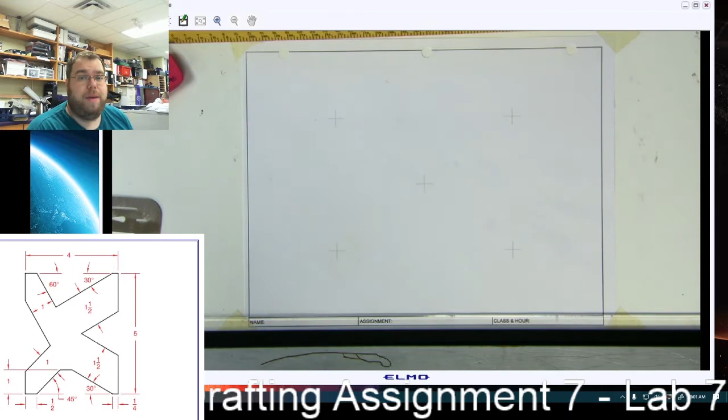And it is the one that looks like kind of a funky X shape. Realistically, though, this is not going to be that hard of a shape to do. You don't have to figure out any strange angles. All of the angles that go into making this come from the triangles that you have.

So, if we take a look at this, and if I can get the computer to cooperate, I will bring it up on the board, but so far this morning, every time I try to open Windows Explorer, it just does nothing, so I'm pretty sure my computer is about to die. If that happens in the middle of the lesson, we will move on as best I can.

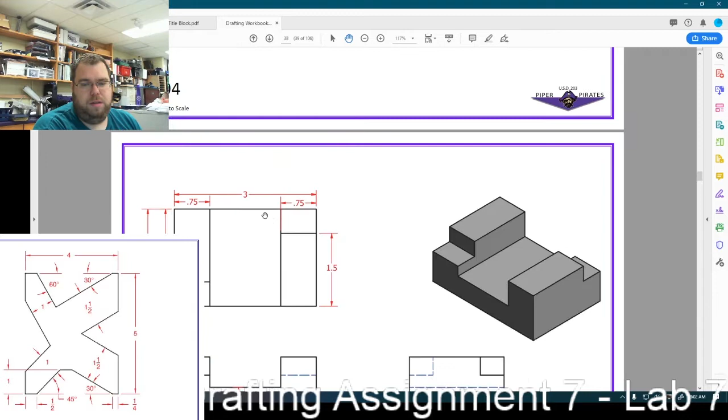Let's see here. Alright, here we go. Alright, so here's what we're going to be doing today.

We're going to center this in the middle of our paper. That's why once again you have a piece of title block paper in front of you that does have the center marking on it.

So what's the first thing that we're going to want to do to draw this shape? Measure the horizontal or the vertical. You can choose which. And then do what with that measurement? Put dots, but yes, that's exactly right. And then let's finish that thought. And where do we put the dots on the paper?

In the middle. So you measure the horizontal, you find the middle of your paper, and then what do you do to figure out where the dots go on your paper horizontally? We're missing one step here to get to place it right. Centered, but how? How do we know? Do you want me to explain it?

Just yeah. Okay, so it's 4 inches wide. So you want the left side to be 2 inches and the right side to be 2 inches. Right. So you take your 4-inch measurement, divide it in 2, and then you put the center, so in this case it is 2. You put the number 2 measurement on the center of your paper.

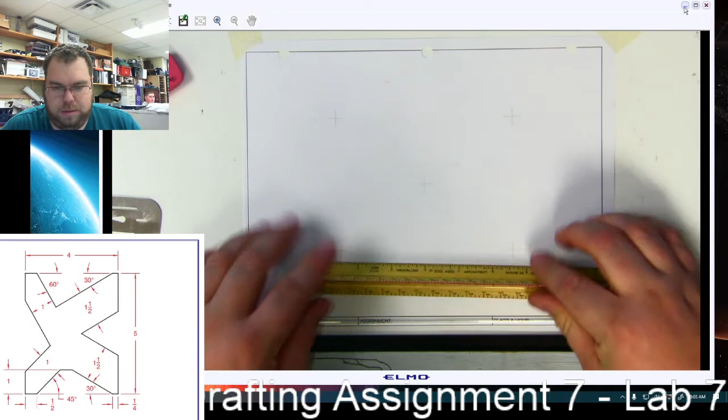So remember, like this. Take your scale, find the number 2. There you go. And you place it so that the number 2 is centered on your paper. Okay? Justin, you want to put your phone away and follow along, please? Yes, sir. Thank you.

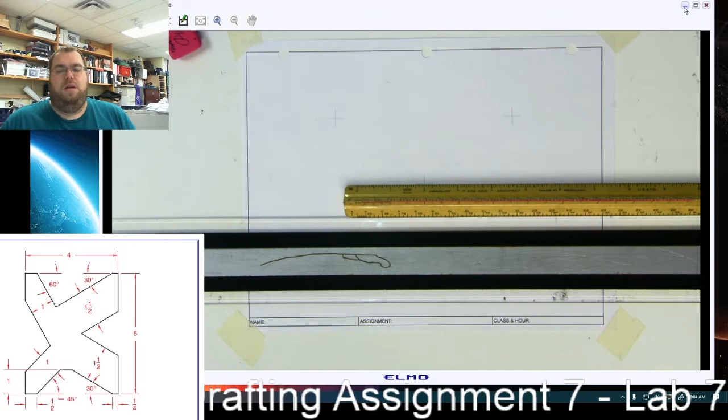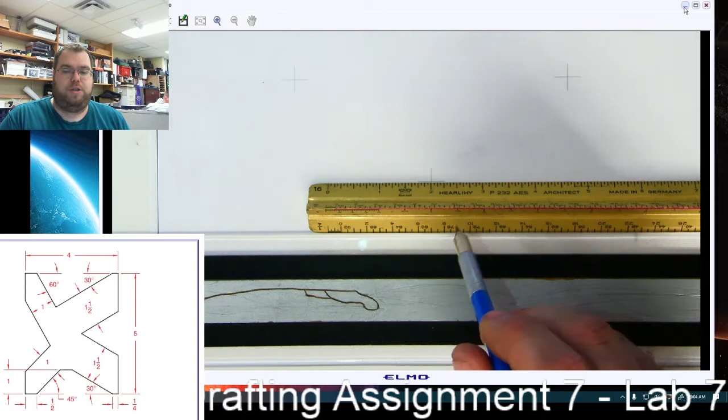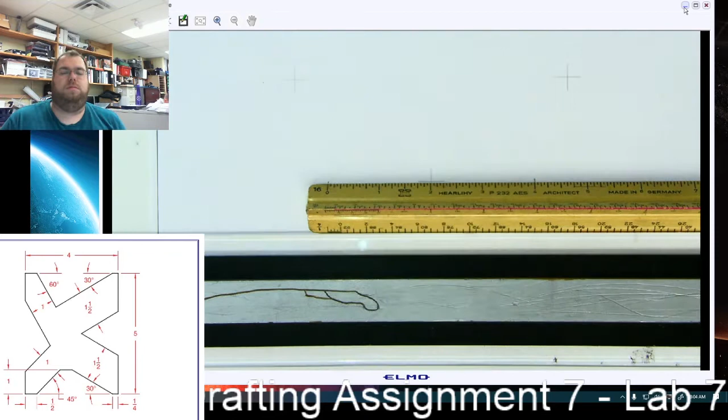Alright, let's see. Zoom in on that a little. There we go. Alright, so I have my scale set up so that the 2-inch mark is sitting on the center mark of the page. And then I put a mark at 0 and a mark at 4. Gives us the outside edges.

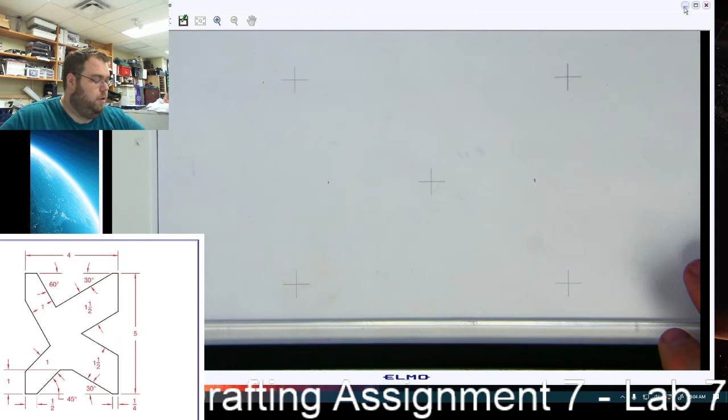And who wants to explain the horizontal or the vertical measurement for me? What do I do here? Somebody I haven't heard from.

Sure. So it's 5 inches tall. Okay. I'm gonna go vertical and make a mark at the 0. Well, line the cross with 2.5. Okay. And then make a mark at 0 and 5. Perfect.

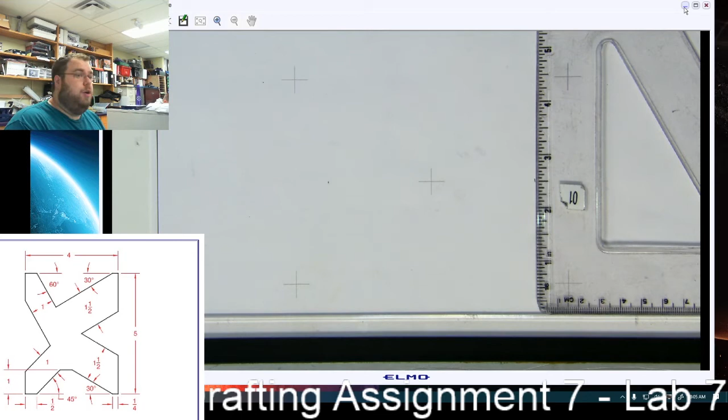And you can do this one of 2 ways. You can either line it up with the center, or you can line it up with one of the dots that you just made. The reason I would go with that is because it gives you an easy way to know where your line stops and where it starts for drawing the top line up here in just a minute.

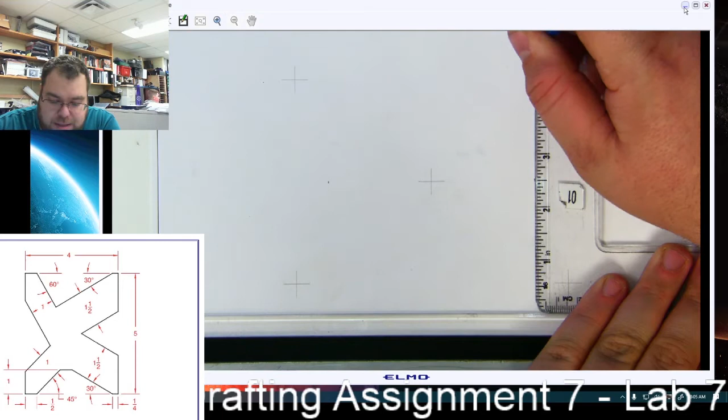So I'm going to set 2.5 on the center line. In this case, I'm choosing the dot. And then instead of making a dot, I'm just going to draw my line from 5 inches down to 0. Remembering that I've got that chunk cut out of mine, which is why the bottom of mine looks terrible.

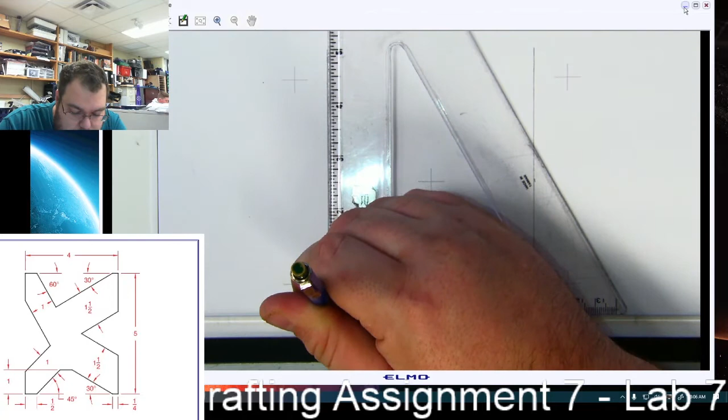And then to save myself a step, I'm just going to slide it over to the other dot that we made and do the same thing again. 5 down to 0. And then I'm going to connect the bottoms before I move my parallel rule.

Now, I am pressing harder than I'm probably going to want you guys to do, because that way you can see what I'm drawing easier on the board. But most of these lines are going to be erased by the time you're done.

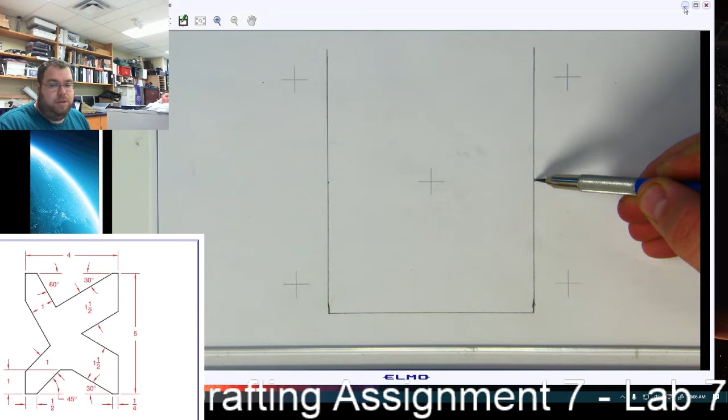Yes, sir? Where do you put the vertical dots? The vertical dots, look, so here and here. Yeah. So the whole shape that we're drawing is 5 inches tall. So we put 2.5 inches aligned with the center, and then you draw a line that's 5 inches long, so from 0 up to 5 inches.

And again, like I said, I'm pushing hard, you should be pushing lightly when you draw that, because most of these lines are going to be erased. Remember, if we look at our drawing here, everything in these cutouts are going to be erased from this box that we just drew once we finish getting the inside stuff done.

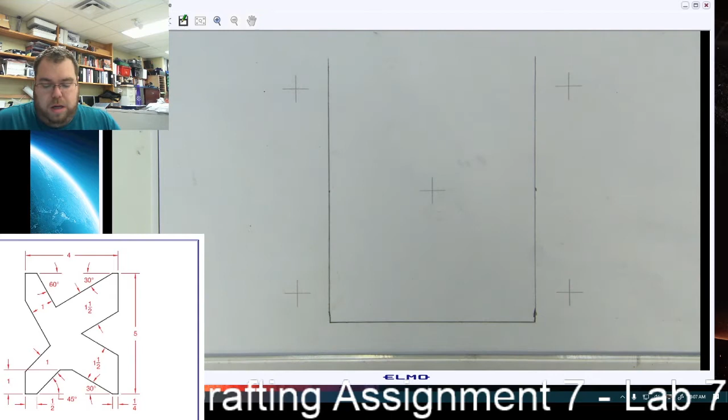So following having that U shape done, the last thing I'm going to do is connect the top, so I have a box. There.

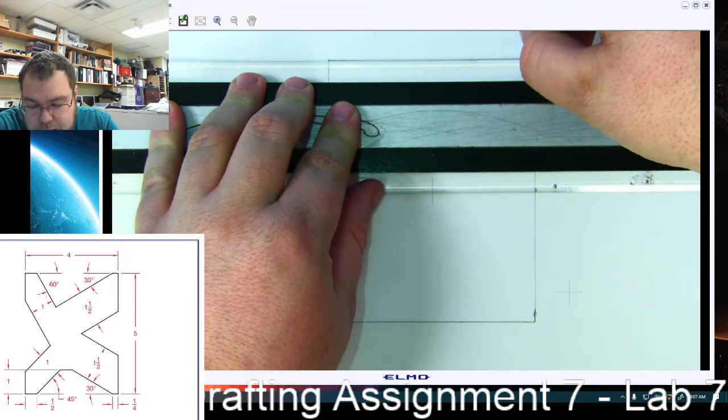Sometimes this can feel like extra work, but as long as you have a box that fully contains your shape, you'll know when something goes wrong with your drawing if your lines are trying to go outside of that box you've made. When they are square or rectangular shapes, it ends up being a lot simpler to create the box that it fits inside of. But even today, when I do drawings now, this is where I start.

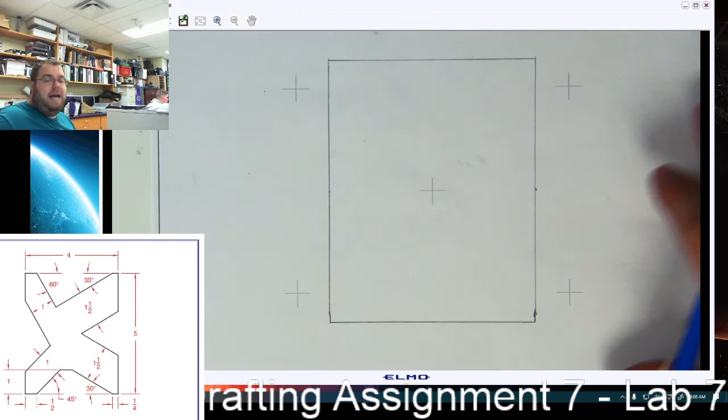It just gives me... it takes the entirety of the paper that we have available, and it constricts it down to just the area that I'm working in. And like I said, it helps me understand if something's going wrong with my drawing, and it helps me understand the overall size and shape that I'm trying to work with.

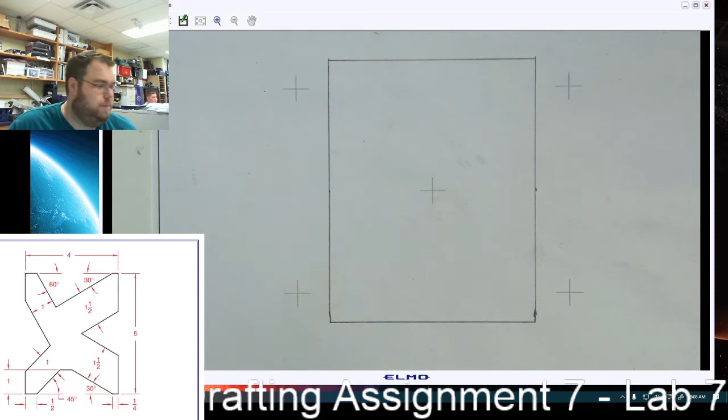And in some cases, it even takes care of lines that I would need to put in later.

Okay, so if we look back at our drawing again, we're going to do as much of our measuring as we can to start with before we start drawing our lines.

So generally with this shape, I work from the bottom towards the top, because most of the information about your horizontal measurements is at the bottom of this drawing, and then they transfer up to the top.

For example, this first line over here is 1/2 of an inch at the bottom. It's also 1/2 of an inch up here at the top. It's 1/4 of an inch on the right-hand side at the bottom, and it's also 1/4 of an inch at the top.

So yes, that's how I figure that one out. The sides are going to be a little more tricky, and I'll show you why in just a minute. Because if we look here, this 1 inch mark right here is not telling us where this corner is that I'm going to try and highlight right there. That 1 inch mark is not telling us where that is. It's telling us where this horizontal line is right here.

And this is pretty easy to figure out the location of, but we have to do some other stuff first before we can do that.

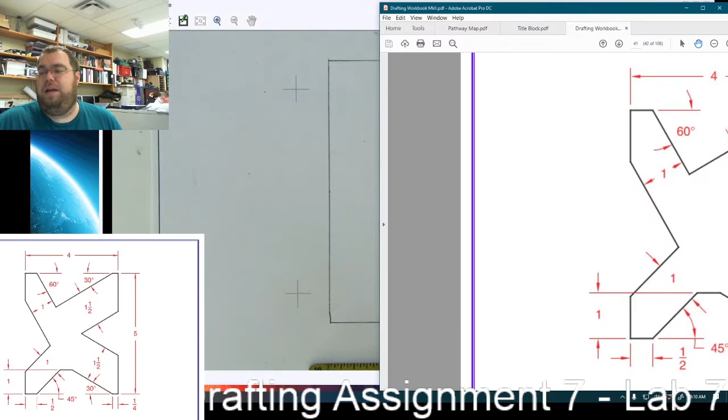So first things first, like I said, we're going to do our horizontal measurements. So I'm going to set my scale back on my parallel rule and line it up so that 0 to 4 inches is measured across the bottom of the shape.

So like I said, we'll make our mark at 1/2 of an inch over. And then on the other side, at the 4 inch mark, so where it's measured to 4 inches right now on here, we're going to come back a 1/4 of an inch. Or if you're reading the measurement on the ruler, it'll be 3 3/4 of an inch. So right there.

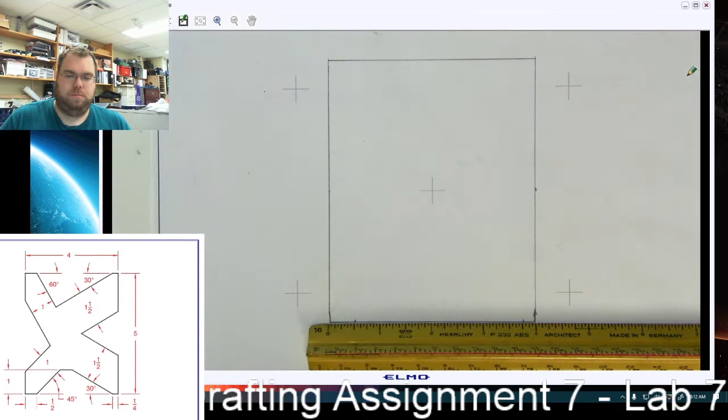The other thing I'm going to go ahead and do before we start doing any of our angles is put that line in 1 inch up from the bottom, but at the moment we don't know exactly where it needs to be placed horizontally. So we're going to make a line that is longer than we need, very lightly, so that we can erase the parts we don't need here in a minute.

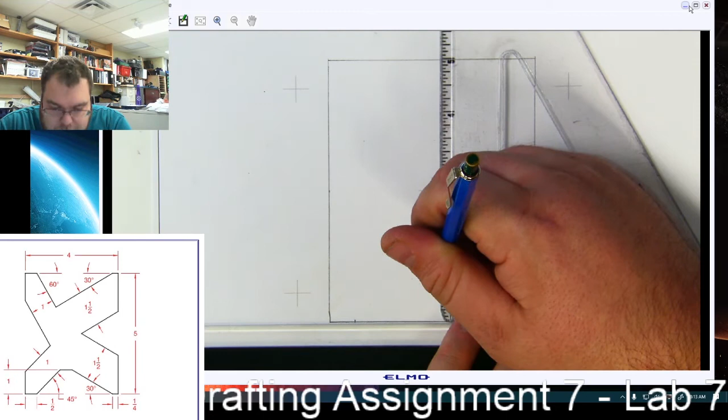And if that sounds confusing, it shouldn't be. We'll just give it a second here. So I'm going to line up the bottom, or my parallel rule with the bottom line. I'll make a mark at 1 inch above that.

Put my pencil on the mark I made and move the parallel rule up. And then obviously this line is far longer than it needs to be. But that's fine because it gives me plenty of room to know where I'm going to have to stop these angled lines that you see right here. So when I draw this line up, it gets stopped by that 1 inch high line.

So that's the last of the horizontal or vertical lines that we're going to draw for this. Everything else is going to be a measurement based off of one of your triangles. In a couple of cases, kind of both. And I'll show you what that means in just a second.

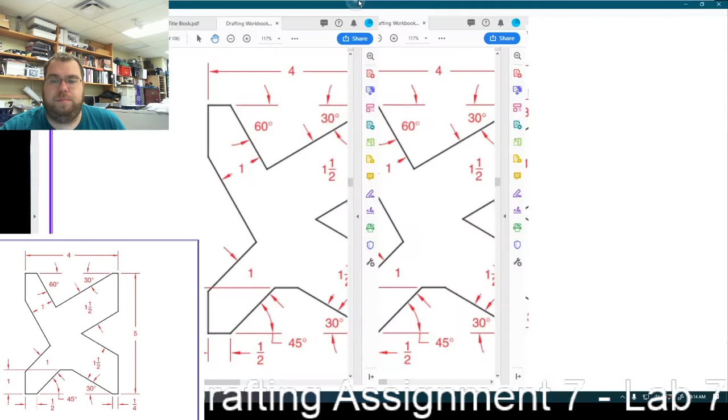So I think the first one that I'm going to want to draw is going to be this 30-degree angle over here. And to do that, it's going to be really simple. So we're going to take our 30, 60, 90 triangle, set it so the hypotenuse is resting on our parallel rule, like that. And then I'm going to line...

The edge with the inch measurements on it up so that that dot we made, a 1/4 of an inch from the right-hand side line, is touching that 30-degree angle. So just like this.

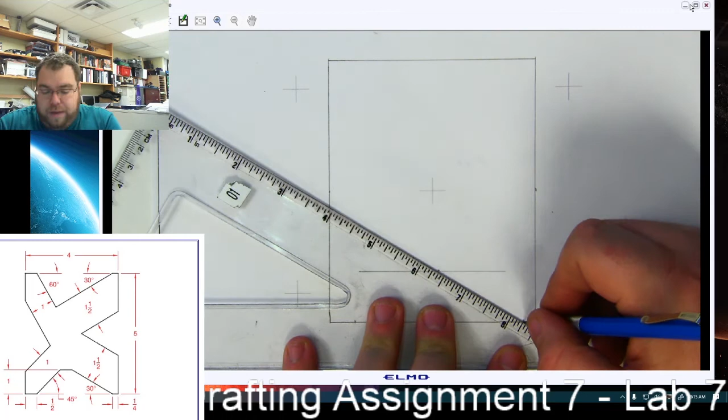And then I'm going to draw a line up to that 1 inch or the horizontal line we drew last, so 1 inch from the bottom. And I went ahead and made that one pretty dark because I know that this is a line that I'm going to keep. There's going to be no erasing there that I'm going to have to do afterwards.

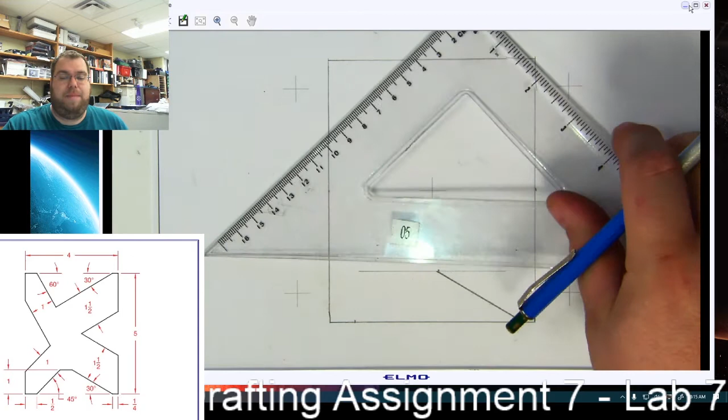If we look back at our drawing, the next one we're going to do, if we want to continue working from the bottom up, is the 45-degree line on the opposite side. The process is exactly the same, except this time we'll use our 45-degree triangle. Everything else about the process is the same. The hypotenuse still sits on our parallel rule.

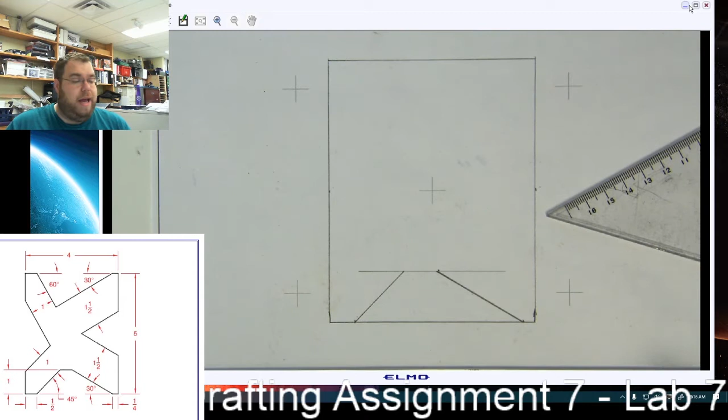We line up one of the equal length edges so that it's touching that dot we made a half inch from the left-hand side, and we carry our line up to that. I made it as dark as I felt like I needed for my final drawing, because this is one that we won't have to erase.

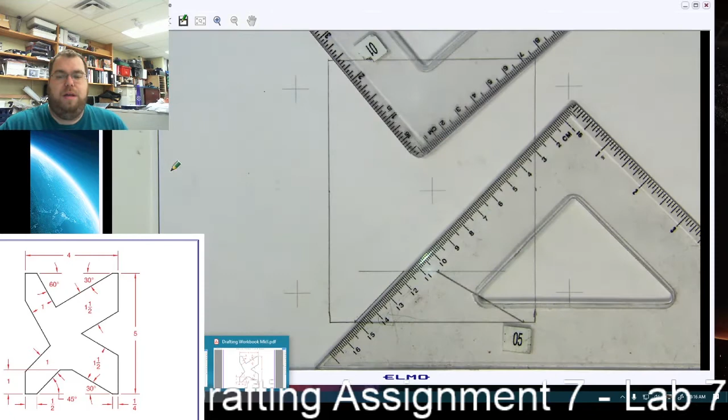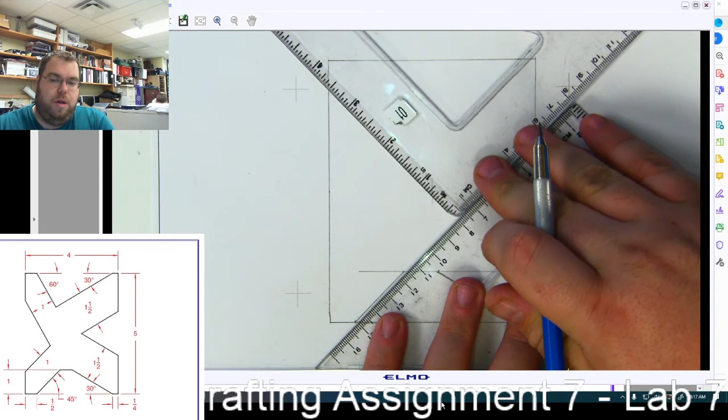Now, before I move the triangle, we're going to have to use both of them together to find our next measurement. We're not changing angles, but if we look at our drawing, this leg of our funky X shape—this top edge of it—is 1 inch away from the line we just drew. So the only way to measure that is to take our 30-60-90 degree triangle and lay it against that edge we just drew our 45-degree line against.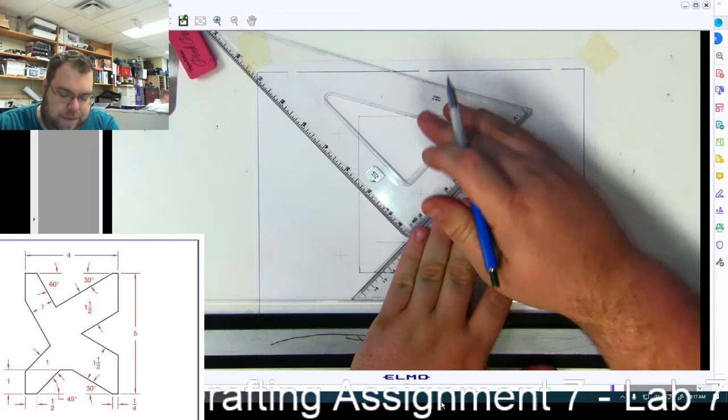So you see what I'm doing here? We have my 45-degree triangle here, and we have the 30-60-90 triangle set so that it is pointing up and to the left. I think after 32 years I'd instantly know what's left and right, but sometimes I have to think on it.

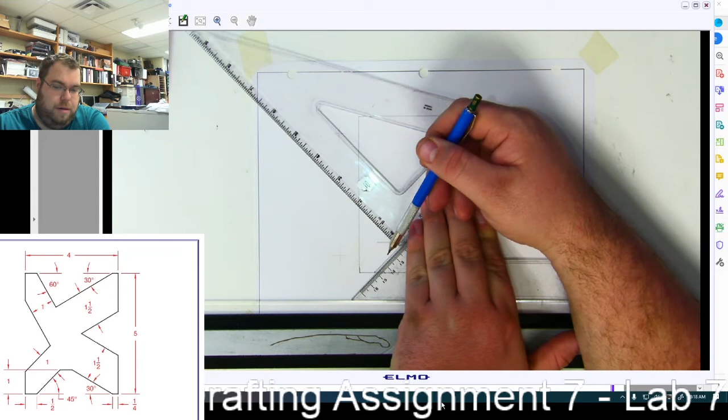Okay, so what I'm going to do then is put a mark at a measurement that is 1 inch away from the line we just created. So we have our line here, we're measuring up this direction, and we're putting a mark at the 1 inch mark.

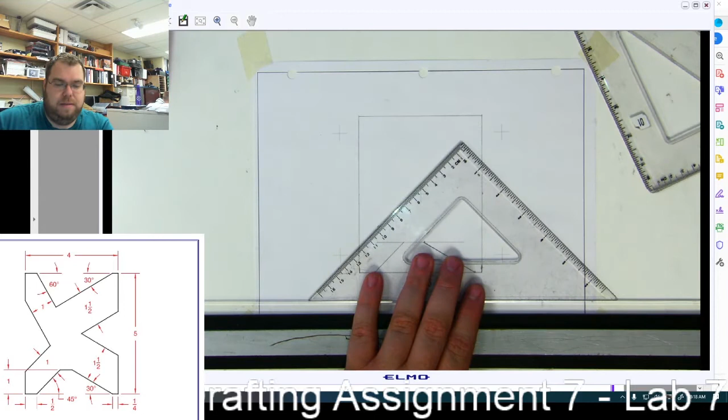Once that's taken care of, I will just slide my 45-degree triangle over and follow the same process we did a minute ago. The only difference is I'm not going to press as hard, because part of this line is going to be erased where it meets this line right here. We will do that after we finish the top.

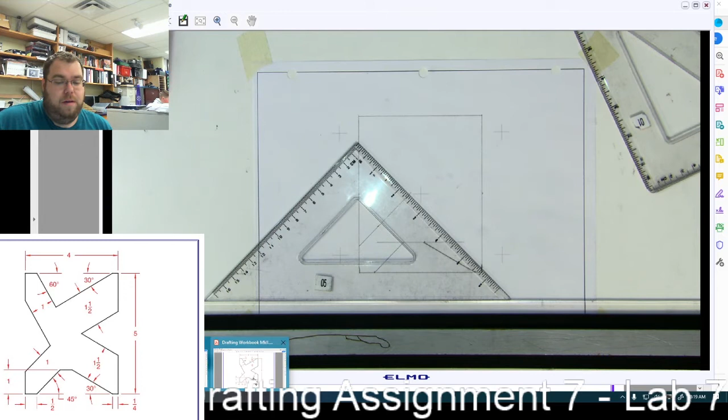So from our line, I'm just going to pull up a ways as long as I know it is farther than we need. We're going to do the same process we just did for the other side. This one is 1.5 inches away from the 30-degree angle.

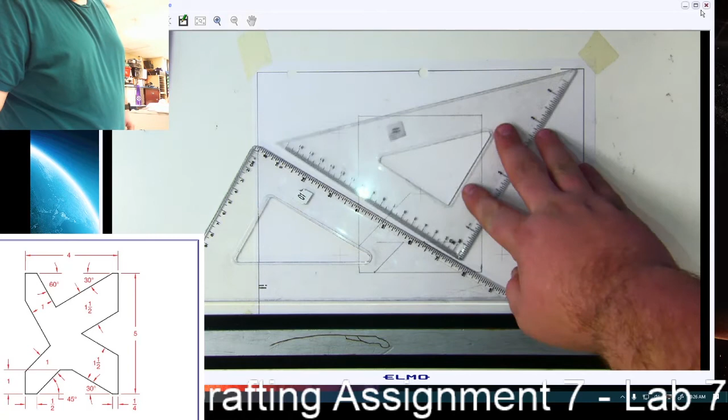Just a second, you're going to switch triangles so that you have the hypotenuse of your 30-60-90 triangle set up like this. Set it against the 30-degree angle on the right-hand side. Then you set your 45-degree triangle like this on top of it. It may not fit if you flip it over—the numbers are just backwards, but they still measure the same.

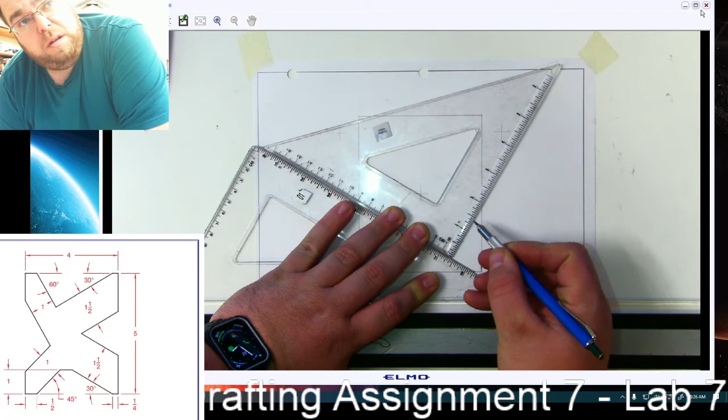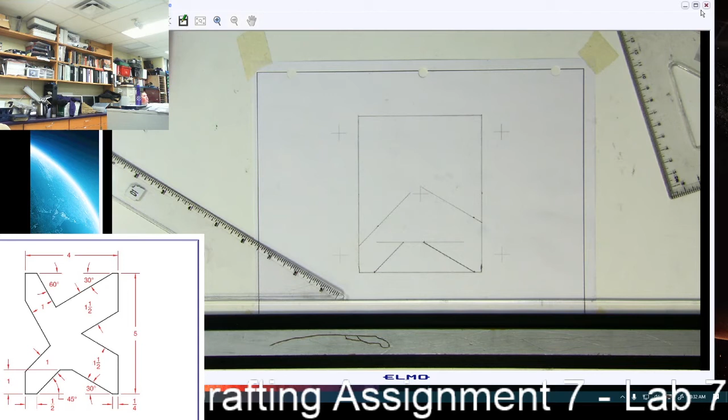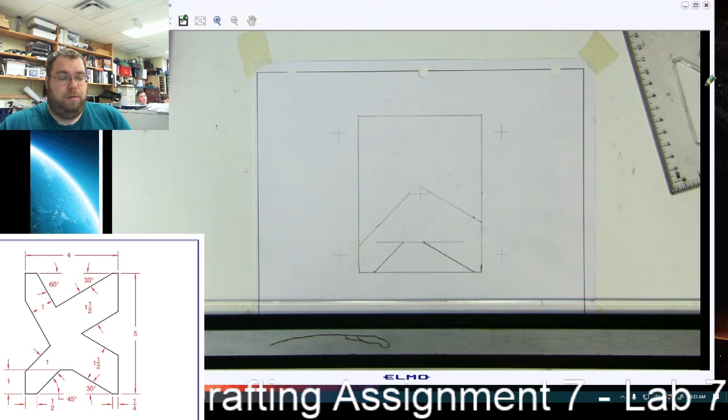Okay, so the top portion has all the same skills we just did, but you don't have to switch triangles as often. So here's how we're going to do the top. If we look at it, it has a 30-degree side and a 60-degree side, and because it's a triangle, we know this inside corner is going to be 90 degrees—30, 60, 90, 180. So if we take our 30-60-90 triangle and put it like this, we have all the angles we need to draw this.

Now, there are a couple of ways. If your paper is closer to the bottom of your drafting board than mine is, the easiest way to finish this is—well, let's all do this first and then I'll show you that. So take your 30-60-90 triangle and set it so that the smallest end is sitting on your parallel rule, going up and down.

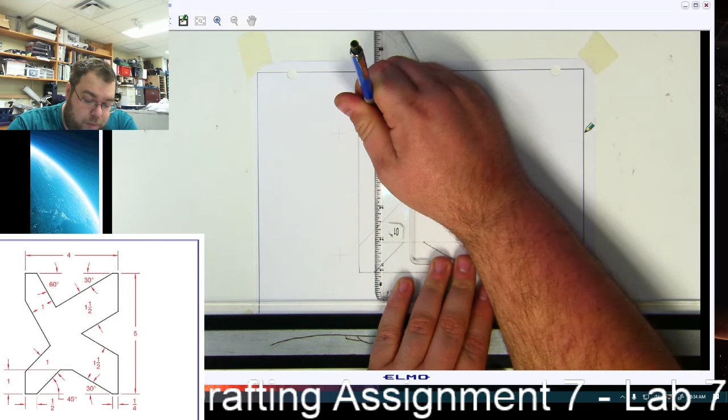Line up the parallel rule and the long measured edge of your triangle with that dot that's half an inch away from the left-hand side—the start of your 45-degree angle at the bottom—and transfer that measurement dot to the top. You're going to do the same thing over here on the quarter inch measurement on the right-hand side. So I put a dot right here. Don't mind the little arrows, I'm just trying to help you see what I just drew.

Alright, so like I was saying, if your parallel rule can go up high enough, my paper's pretty close to the top of my board, so this is not going to work for me.

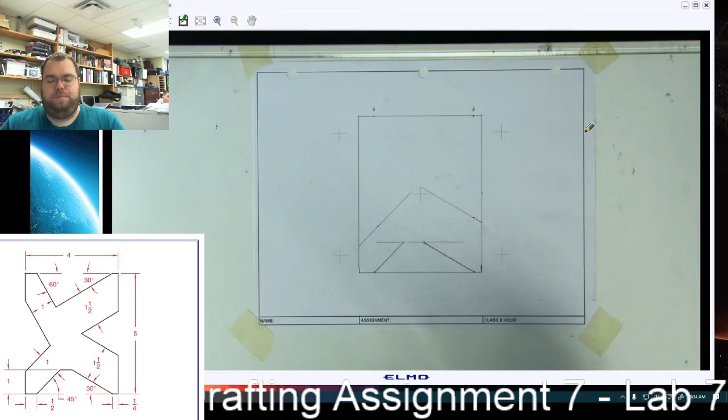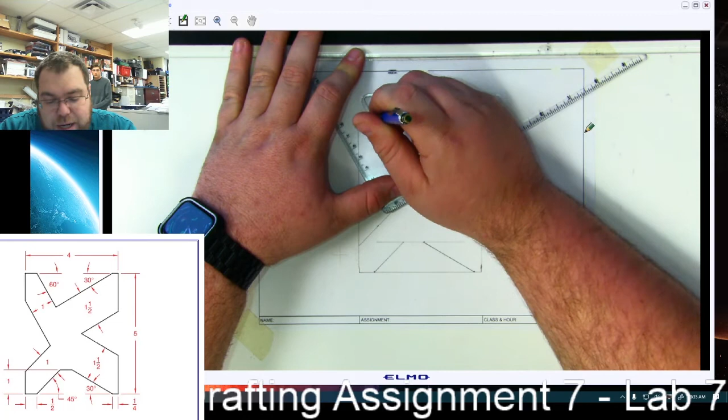Actually I might be able to do it with the inside cutout. If you lay it upside down like this, you should be able to not draw this in such a way that your lines are too long. With the cutout in mind, there's enough space that I can use it as my straight edge, and I'm just going to draw down on the left hand side and then on the right hand side at the angles of the triangle.

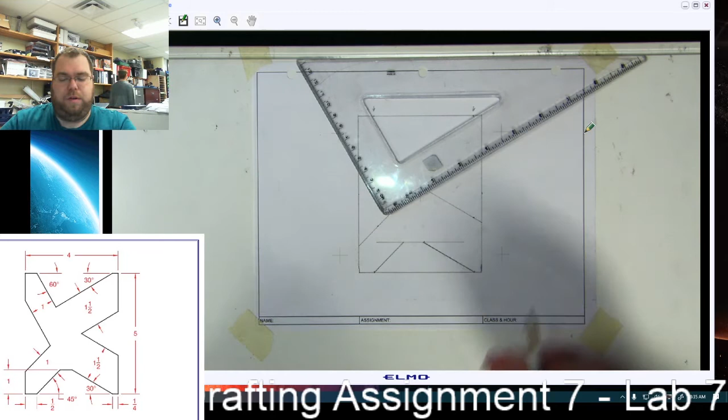So essentially I'm going that way and I'm going that way. If you cannot fit your triangle like that, then you can slide it from side to side and do the same thing. Or if it's up too high to even put your triangle on there upside down, you can do it like this: from the point down and go a little too far, slide it over and do the same thing on the other side.

And then our last steps are going to be the same. We have 2 lines left to draw and everything else is erasing.

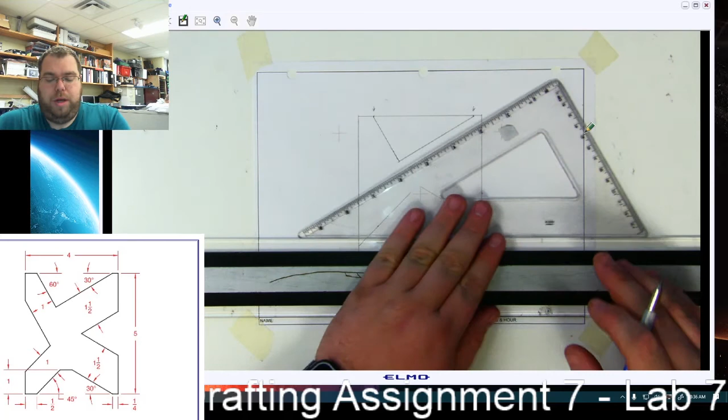So what I'm going to do is take my 45-degree triangle, set it up so my measurements that I want to use are going away from this edge of my triangle. If we look at our drawing, the space between this line and the one below it is 1.5 inches, just like this corner over here. So you're going to come 1.5 inches from this line down this way, just like we did a second ago.

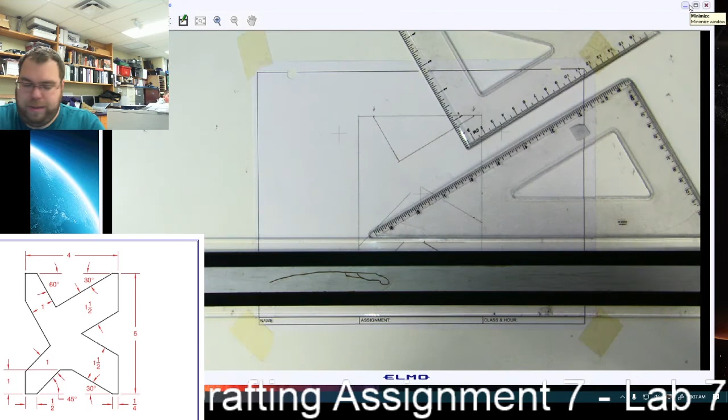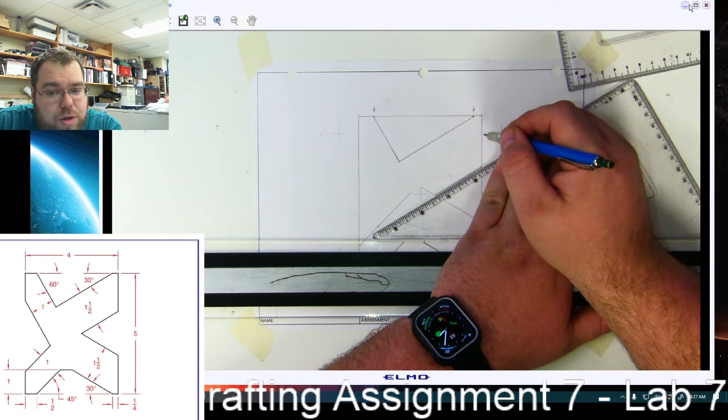Except I'm doing it slightly in reverse. And what I mean by that is, instead of putting my angle on the line we drew already, I'm putting the measurement on the line we drew. So I don't even have to do a measurement dot, I can just go ahead and draw my line. It's going from the edge of the drawing on the right side to the line we drew below that we knew was too long.

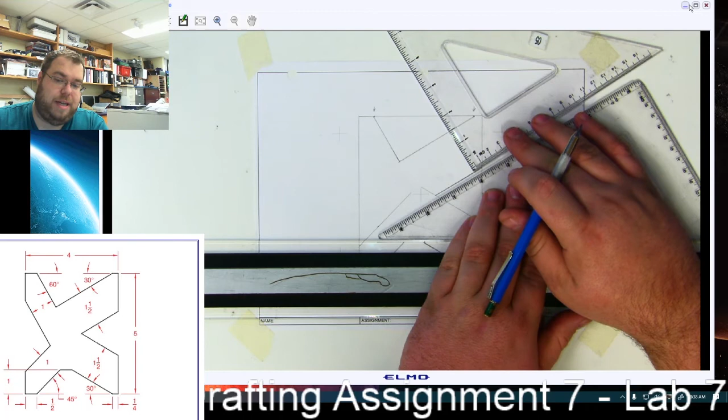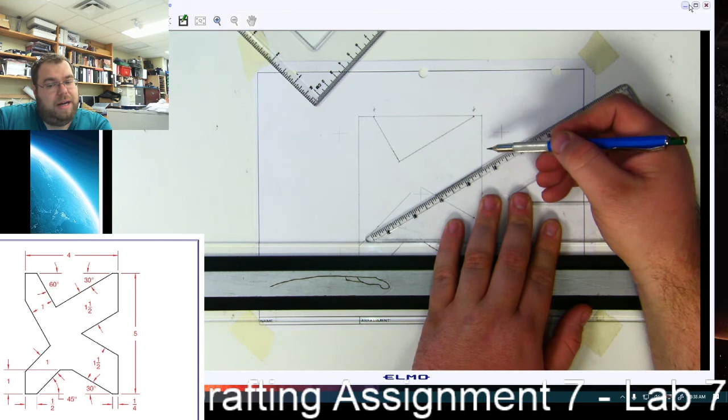So you go down how far on that right side? 1 1/2 inch, just like this. I put it so that 1.5 inches was sitting on the line I had already drawn up here. And then I moved my 30-60-90 triangle until it comes up flat against the opposite side of my 45-degree triangle, just like that. Then I can get that out of the way because I don't need the measurement anymore, and just drew the line between this on the right hand side and the line that we drew below.

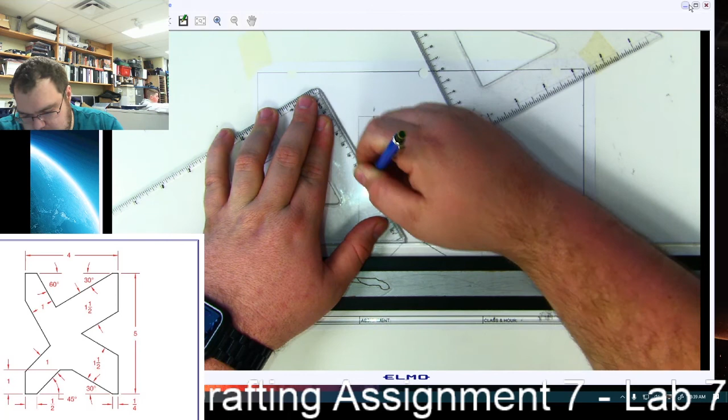I'm going to draw the last line the exact same way, except this one's only 1 inch. So I put the inch mark on this 60-degree line, get my triangle out of the way, and draw that. That's all of the lines that you have to draw to finish this shape.

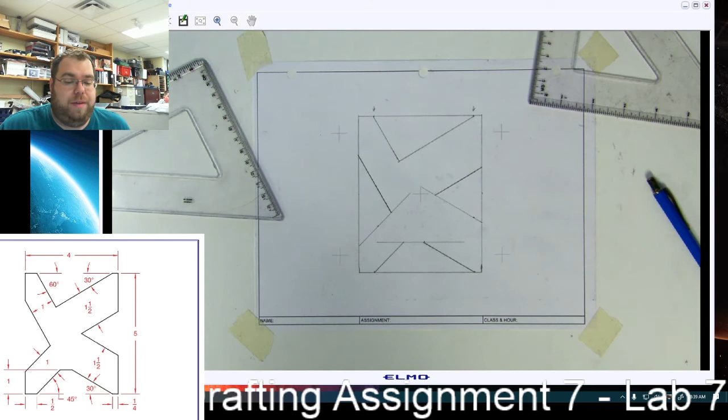In order to move forward, the last thing we have to do to finish this is erase all of the bits and pieces that we don't need, so that all we're left with is what was in the drawing that's not in red or light gray, I think is how it's printed in your books. So using my erasing shield, covering the corners I want to keep, and as soon as I finish erasing this up, I'll be around to help anyone who needs it.

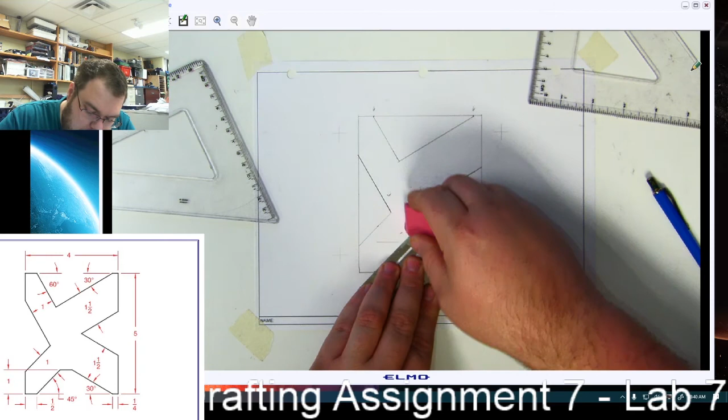Okay, and notice in my erasing that also includes the box around the outside that I don't need.

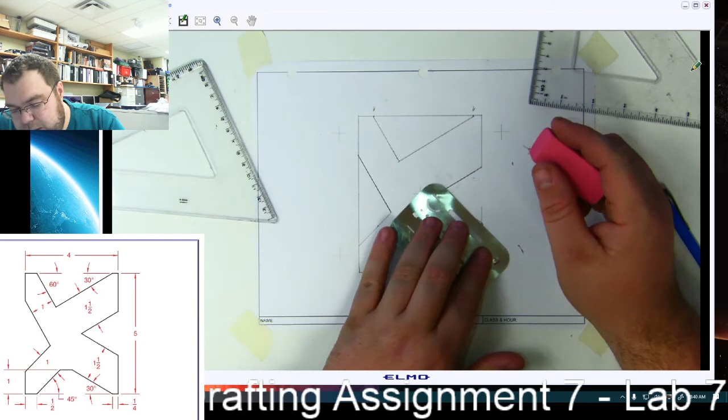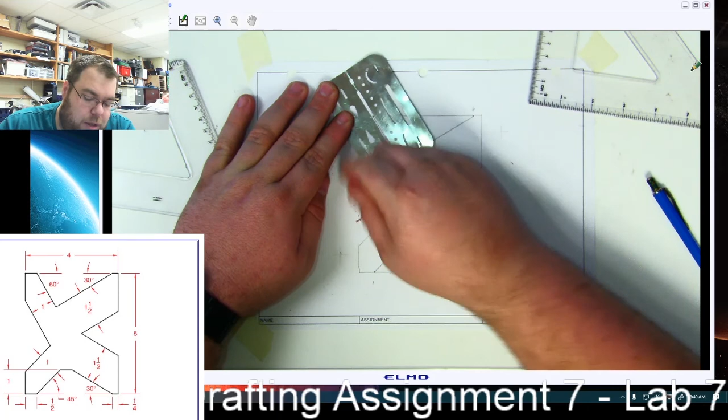And if you drew those outside lines pretty lightly, or if there's anything that's light in what remains, you need to go back and darken them in so that you can see them better with CamScan, or so that they're obviously intentional lines even if we weren't turning them in through the Canvas app.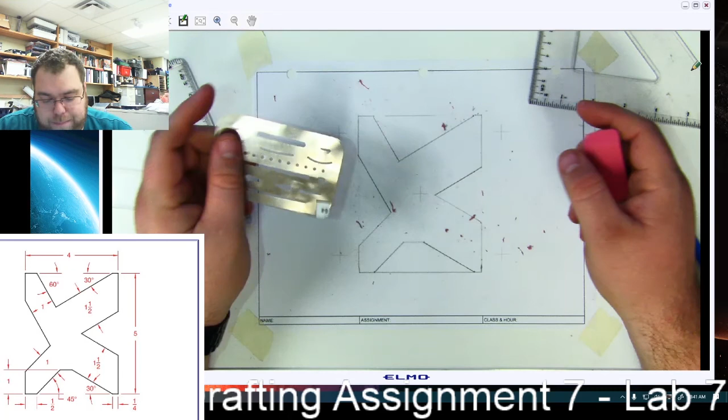And if you're wondering what all of these cutouts are for on here, we'll discuss what some of them are for once we start having need of them. Like some of them help you draw specific kinds of lines, dashes, if you need a curve taken out of something.

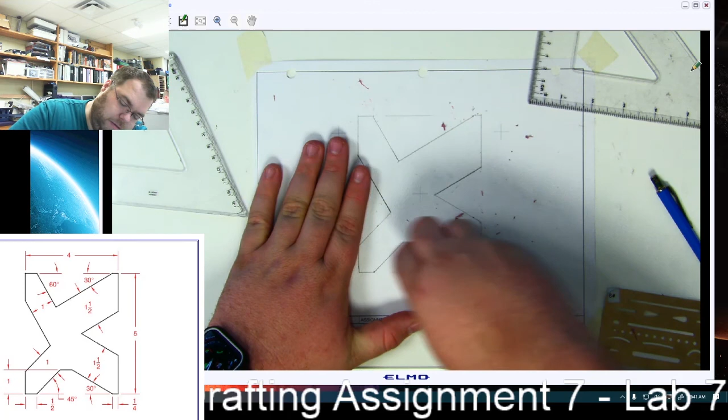Now, because I don't want to smear or smudge my paper, I'll go ahead and use my brush.